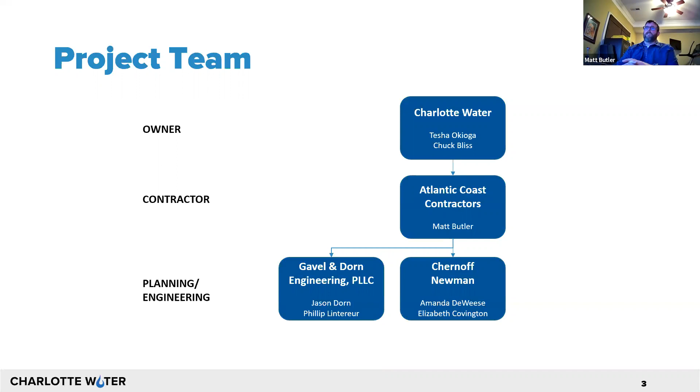I'm going to throw it over to Tesha, who is with Charlotte Water. Hi, my name is Tesha Okioga. I'm a senior engineering project manager with Charlotte Water, and I am the project manager for this project. I'll take it over to Matt. Hey everybody, my name is Matt Butler. I represent Atlantic Coast Contractors. We are the design builder and the general contractor represented on the project. And I'll introduce Jason Dorn with Gavel and Dorn Engineering. Thanks, Matt. I am Jason Dorn. I'm with Gavel and Dorn Engineering, and I'm the project manager of the engineering team working on this design build project. And I'm going to get right into the presentation, beginning with the goals of this project.

First of all, the goals are to improve and upgrade the wastewater collection system that over time has gotten worn due to high usage and also natural and man-made obstructions. We also have the objective of increasing wastewater capacity to meet future needs where necessary. A big goal is to reduce the risk of sanitary sewer overflows, which can occur if you have a collapse of the pipe and a blockage, and thus the sewage escapes and potentially gets into the creek, which brings us to our last goal, which is to protect the water quality in McMullen Creek by keeping the sanitary sewer in the sanitary sewer system and separate from stormwater.

To be clear, we are only addressing the sanitary sewer system in this project. We're not dealing with any drainage issues or any creek improvements, nothing of that nature.

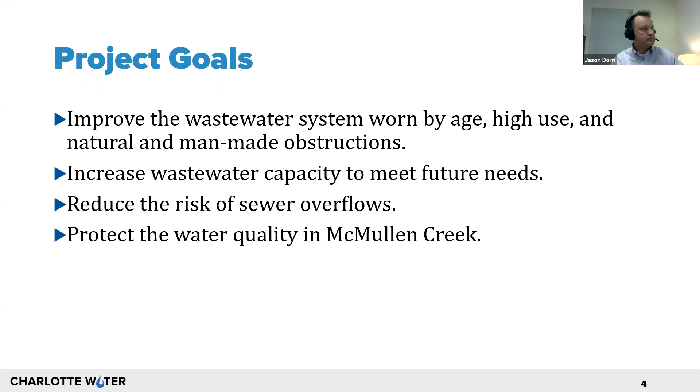This overview of the project has two major components. The first component we're talking about tonight is the Rosemary to Sharon Hills sanitary sewer rehab, where the upcoming work will consist of point repairs and CIPP, or cured in place pipelining, which I'll talk about more later, of sewers located in the streets, the public rights of way, or construction easements, where we'll be basically replacing the pipe and rehabilitating the manholes. So we'll end up with a comprehensive fix of the entire sewer system.

The other major element of the project is what we're calling the Quail Hollow branch wastewater work, which we're currently in design. There, we are looking to replace the existing pipeline to upsize it and increase capacity.

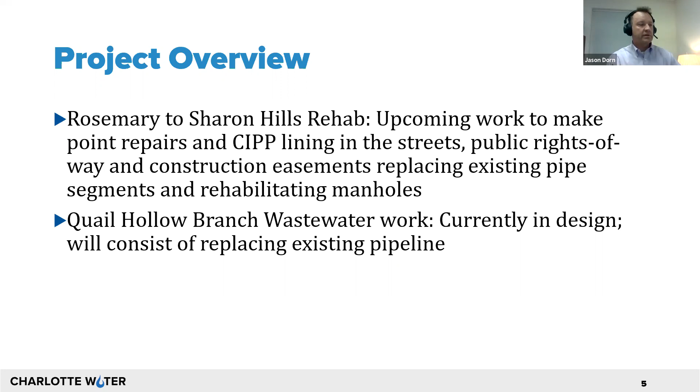This graphic is an overview of the project area. To get your bearings, this is obviously the golf course. Gleneagles Road is coming through east to west, and on the west side of the property is Park Road. Major elements include the McMullen Creek trunk sewer, which is a parallel pipeline that follows the creek, as most sewers do.

Think of that as the sewer highway conveying wastewater down to the wastewater treatment plant. And then we have these collector lines that feed into it.

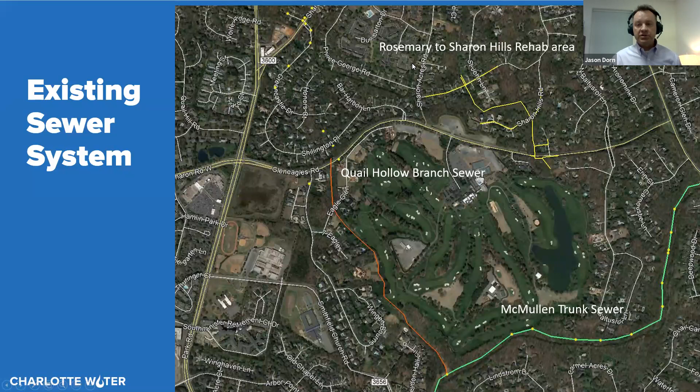The red line is the sewer located on the west side of the golf course, and that's the second part of our project. But today we're focused on this yellow area here, the Rosemary to Sharon Hills rehab area.

This graphic is a zoom in on that particular area. It should look familiar to folks. Rosemary Road's up here, Gleneagles is down here. What we are showing is the existing pipe network with these green lines, so that's the sanitary sewer system in the neighborhood. These white dots are the manholes.

You can see the sewer is located in the street and also between houses and along the creek behind houses. So this is where we'll be working.

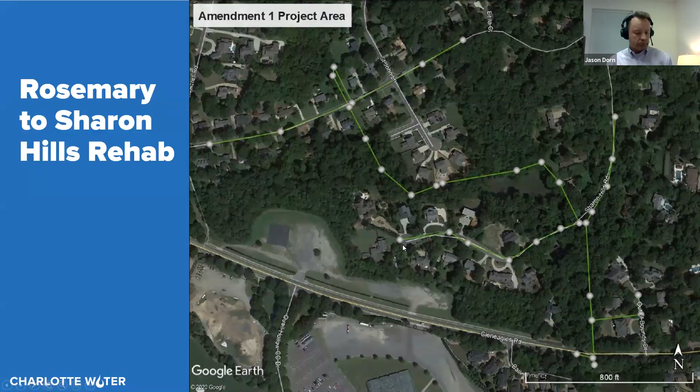We've performed geotechnical investigations to figure out what the conditions are underground. Is there rock? Is the soil suitable for construction? We've performed closed circuit television inspections of the pipe, where we actually run a robotic camera through the pipe network to identify defects so we know where the problems are so that we can address them.

We're also in the process of designing new pipelines that applies more to what's going on the west side of the project. And finally, we've acquired easements and are in the process of acquiring more easements to facilitate construction.

The next few slides attempt to give you a flavor for what construction is going to look like for the residents. This slide summarizes the major construction activities. First, beginning with mobilization, which is bringing equipment and material to the site, clearing of the easements, lane and road closures, and detours around active work areas.

At times there will be loud machinery running to be aware of. There will be construction traffic of various types at various times. There is potential for odors, which I will talk about on the next slide. And in general, we don't anticipate impacting your service more than an hour at a time.

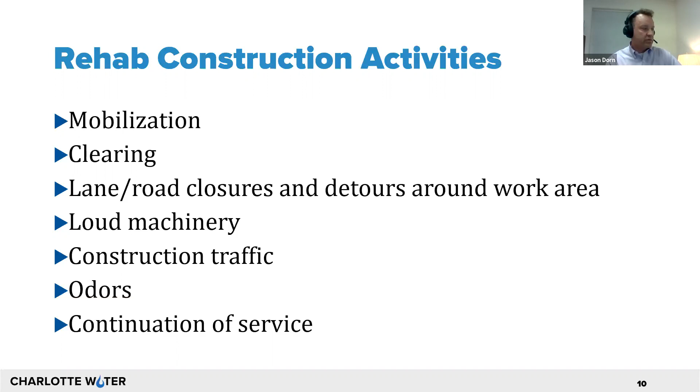The curing process of the cure-in-place pipe, while it's active, has the potential to release odors, and those odors have the potential to get in the house. What we ask you to do to minimize that potential is to please pour a gallon of water into floor drains, toilets, and sinks when the work begins, and that will trap the odors and keep it in the sewer system and out of your house.

In particular, think about that sink or bathroom that you haven't used in a long time. That's generally what happens is people forget that they have a floor drain somewhere, and we ask that you pour water in that, and that'll keep the odors out of your house, and that'll be a good thing.

Service during construction, we ask that as much as you can, please limit your use of the sewer system when you see the crews are active on your street or in your area. We would ask that if you could delay maybe doing laundry until after work's complete, showers, things of that nature. That'll help things go smoothly, so we would appreciate that help from customers.

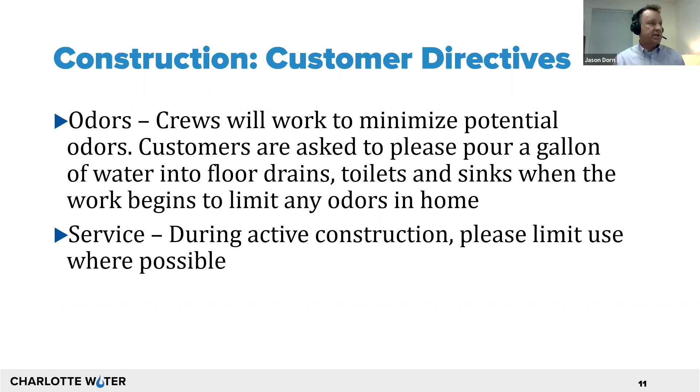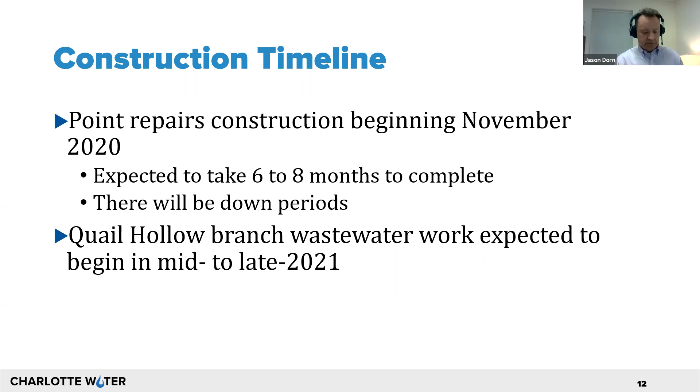The Quail Hollow branch wastewater work is expected to begin in mid to late 2021. The next few slides are photos trying to give you more information as to what to expect during construction. This is of a construction project elsewhere, but it's similar work of point repairs.

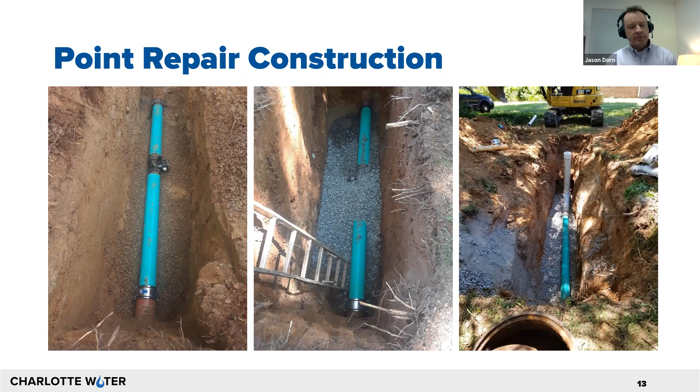Basically, we expose a short section of the pipe. We've performed a CCTV inspection, so we know where those defects are, so we dig down on that short section of pipe. We won't be exposing long runs of pipe at one time. We dig down on it, replace the pipe, backfill with stone and soil, and typically have it put back together by the end of the day. That is everything except paving, so you will see pavement cuts and some patches as we work our way through the neighborhood.

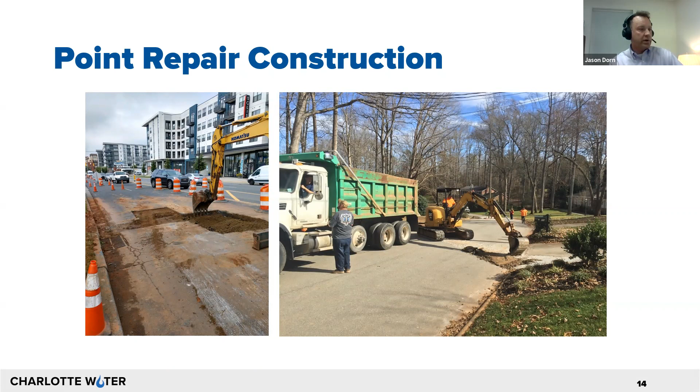That process causes the pipe material to cure. It takes a couple hours to happen, and that's when the potential for odors are there. Once it's cured, we basically have a new pipe within the existing pipe, so when we're done, we'll have a new sewer system. The benefit for you is that we won't be digging up the sewers all over the neighborhood. We don't have to do that to restore the pipe network; we can use the cured in place pipe.

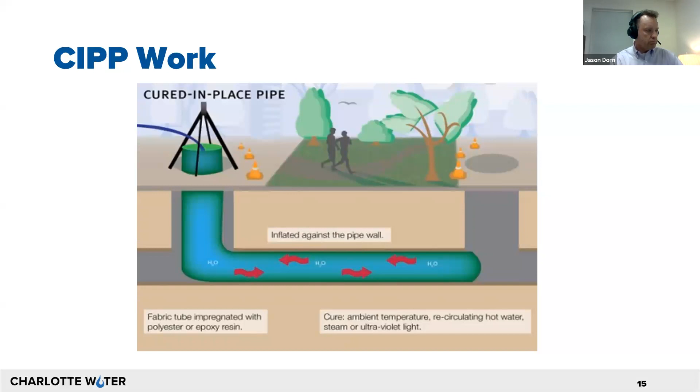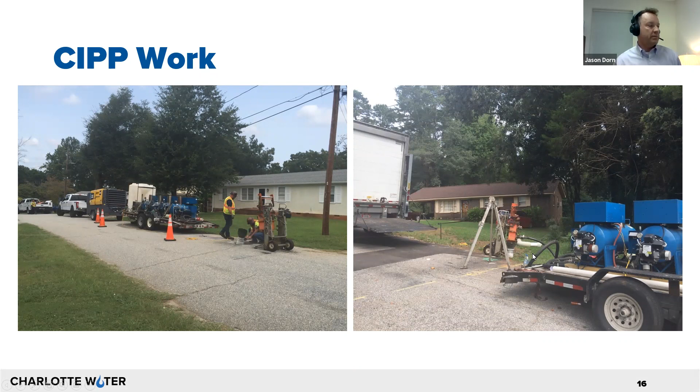This is some photos of a CIPP crew, just to give you a feel for the equipment you can anticipate seeing. We have a variety of trucks out here, pumps and water, and they're setting up over a manhole, introducing the felt liner. They have a box truck here that contains the liner. The liner has to come in on a refrigerated truck, and then they're set up over a manhole while it cures. So that's the notice that there's no excavation going on, no excavation equipment here.

With that, that's an overview of the construction project. I'm going to turn it back to Amanda to cover communications.

Thanks, Jason. Many of you watching this have obviously gotten mailers from us before. We will continue to share information with all the residents and people impacted by the project throughout the project. This is not the last time you'll hear from us, that's for sure. Our project webpage, you can go to Charlotte Water and find it by the projects, or go to the shortened URL we've created, /CLT-WaterQH. If you have specific questions about the project and can't find answers on the website, we encourage you to reach out to project contact Tesha, who spoke earlier, and her information's on there and on the project webpage.

We will continue with mailers and door hangers as needed to let you know construction is coming, and certain potential impacts or directives we may ask of you throughout the next 8 months of the project. Homeowner and neighborhood associations, if there are contacts you want to share with us to make sure we're keeping everybody in the loop, please let us know. And Nextdoor, Charlotte Water will be sharing information as needed through Nextdoor posts, so there are lots of ways to stay up to date and in the loop on the project.